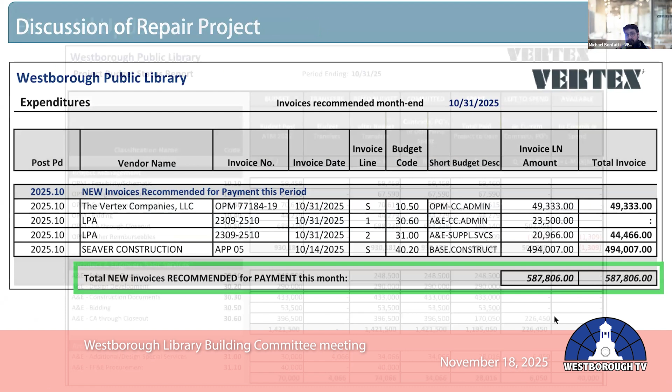From that, we have a review of our current budget status report, also provided in the document sent out yesterday. As a brief synopsis, we've spent roughly $3.7 million to date, with $7.1 million remaining to be spent. Any questions on the budget status as it stands?

I'll add, for the committee's edification, about $2 million is spent right now with a contract of about 8.3 million. That's pretty much in line with our original cash flow. We'll update that and make sure the finance director is comfortable with it, as we'll start to see a tick up when some of the larger mechanical equipment comes on site. You'll start seeing the invoices from the contractor go up a little in the middle of the project, then tail off again. So we'll be seeing some higher numbers in the months ahead.

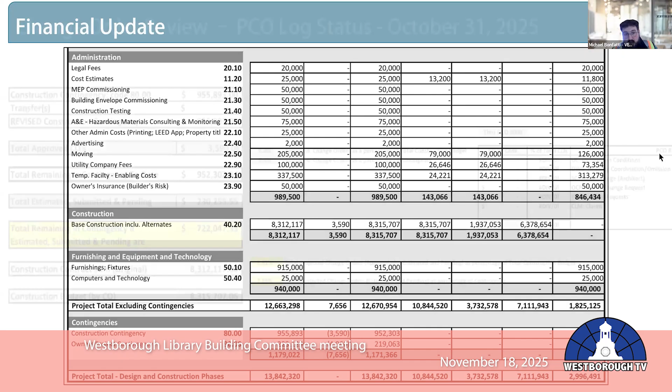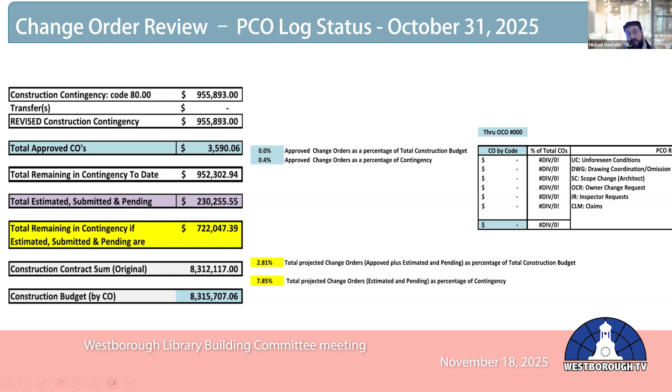And we pushed back on that, which is a formal written response to their submitted change order, or PCO, potential change order. And it came back again at the same number.

So what we want to do now with the construction change directive is use one of the tools that we have as the owner: direct them to do the work, which is fully within our rights. And then we track the amount of time it takes them to do the work, and Bob Tucker will do that on site.

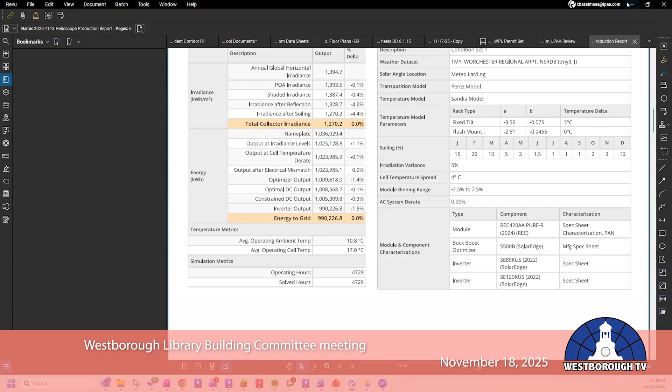There we go. Oh, nice. Oh, look at that. That was pretty.

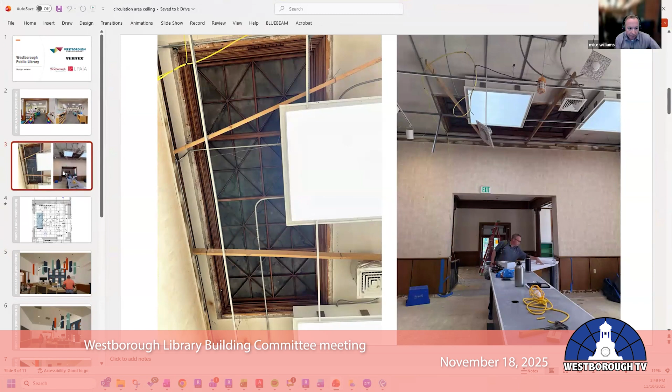So the skylight was revealed after the existing ceiling demolition occurred. At that point, we thought it would be worth pursuing bringing back this historical piece and making it a focal point for the circulation. The work does not need to happen for this project, it's just something to enhance it.

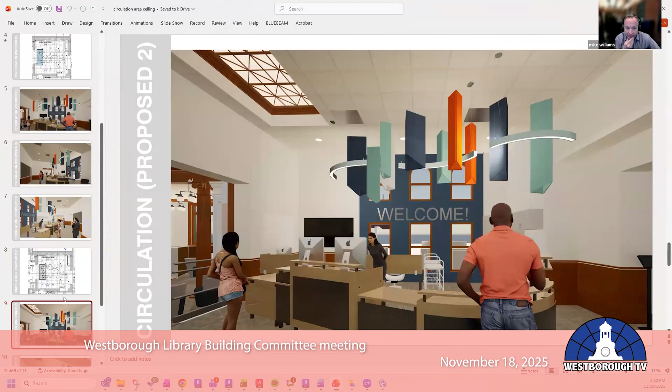Excellent description. Mary, you have a question? Nope, just a comment, just want to give my opinion, and that is, I think we're a town that values our history, and restoring this place, since it's there already, I would be in favor of going forward with this.

Can you show the with-and-without again? I mean, I think it's a really neat thing. I'm curious about Kate and Lynn's opinion because they live there, I don't, but I think it adds a real nice little element and historic charm to this place. I've seen it in the space.

It looks great. I think it would be a shame to cover it up. And I think the added benefit we've talked about a little bit in this room is that with it backlit, it creates a really special space, especially in the evening hours. I do think it adds something really special, connecting the old side of the library and the newer side, if 1980 is newer, this real breezeway that connects all the areas together. I think it adds a lot to the space.

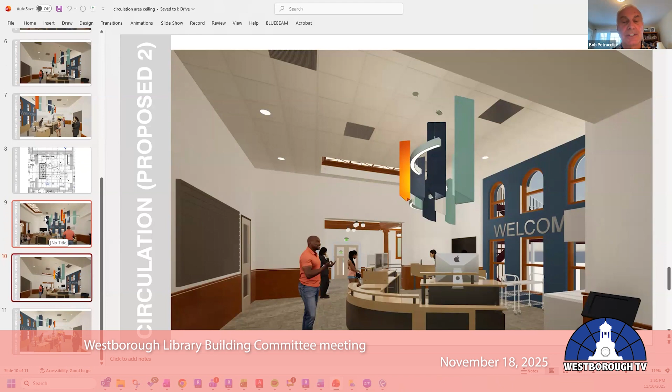For what it's worth, I agree totally that we should include that and keep that in mind. I think it adds a beautiful dimension, and as Kate said, backlit at night, it's going to be nice. Plus it matches the other one upstairs, and it's not like we're adding it. For 33,000, when we have what is it, 900-something thousand left in contingency, I think it's short money for the next 50 years.

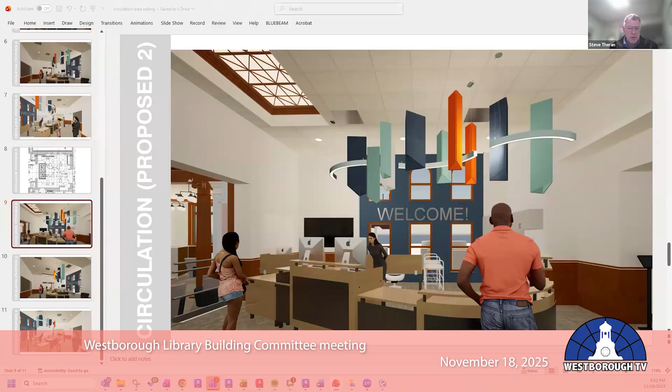So what I described was to authorize Maureen, and that was just my guess as to what might work for the committee, should the committee choose to go forward with this, once submitted, to then authorize a submitted PCO. So if there's a motion along those lines, that would be great. Would anyone on the committee like to make a motion?

I'll make a motion to approve an amount not to exceed $33,898 for PCO 4 for the circulation skylight as shown. Emery second. All right, so I will ask for a roll call.

Walter, Leslie, yes. Kate Caraccio, yes. Al Gordon, yes. Lynn Sukup, yes. Mary Johnson, yes. Bob Petroselli, yes. Pete Dunbeck, yes. Lee Emery, yes. And I am an enthusiastic yes. So that is approved. Keo, yes. Oh, I'm so sorry, Sean, I didn't mean to skip you. That's okay, I'll let you know. Thank you. All right, next item.

So these are shots of the interior of that same space, though it looks far prettier in the last picture. This is after the wall covering has been removed. Mike Williams, I'm going to lean on you again, if I could, to describe what was envisioned here for the work.

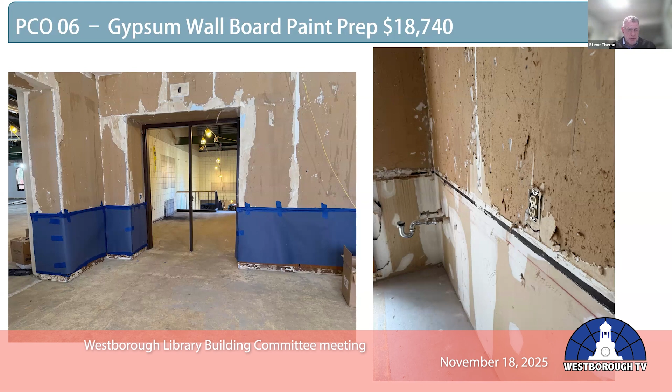What we're looking at here is the main floor, or second floor as I term it. Some progress we've been making lately - it's looking much better, like it'll actually turn into a usable space again. We have a lot of ductwork that's gone up into the ceiling space, come a long ways from having nothing up there at all. It's also allowed us to continue with framing activities in the same area.

We've got a lot of framing going on, the ductwork going up, and rough electrical wiring going on, not only in the ceiling space but also coming down inside the walls, specifically the two toilet areas being installed in this space. That's going along very nicely. We have plumbing going on in that area too, and we had a rough plumbing inspection for the bathrooms yesterday that we passed, which is another step to let us continue our normal construction sequence.

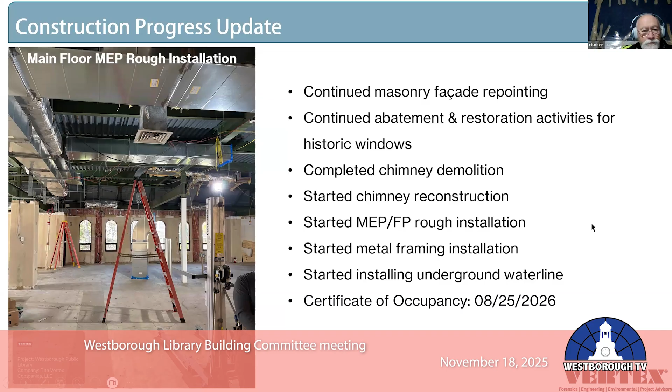We're going along nicely. Got a couple more pictures.

What we're looking at here is the north side chimney - you do have two of them, one on the north, one on the south. The picture on the left is the liner or flue of the chimney as it's been restored, and they were in the process of bringing the decorative brickwork back up on the exterior of the flue area. Also last Friday we had a crane on site where we lifted up the cap pieces that go around the perimeter of the chimney to finish that work off. On the right hand side is the staging, which is blocking a beautiful chimney nowadays, and that will be coming down in the near future.

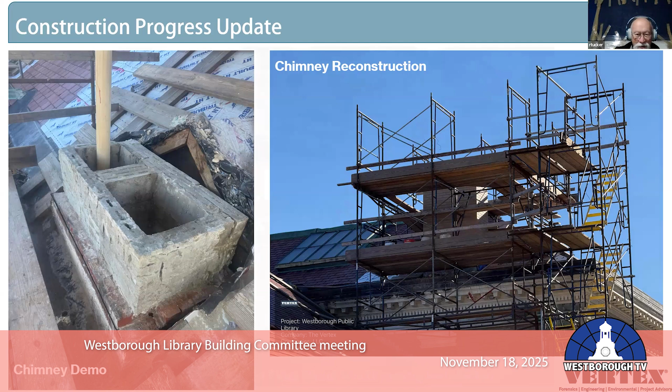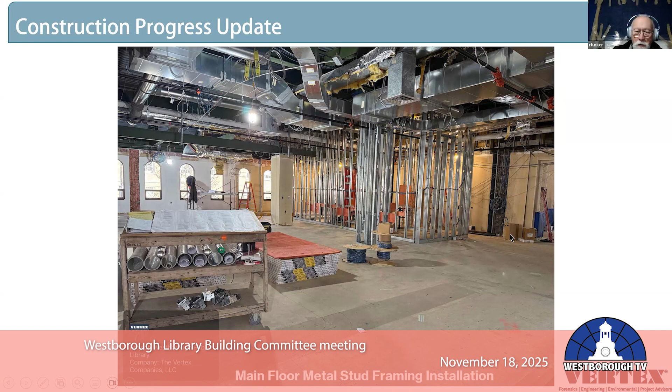Once again, this is the second floor main area. You can see the wall framing around the bathrooms and that last storage room area. Another angle of all the ductwork that's up in the ceiling space - when we get done you'll never see it again, but it is moving along very nicely.

Our favorite trench that we love to hate. This is a couple of photographs of the trench and the installation of the new sprinkler water line and domestic water line as they go up into the building. After much trial and tribulation, today we were under the watchful eye of the town water department and we were able to pass our pressure test of the line, which will allow us to now go on to the second step of chlorinating to clean the line, and also backfilling the trench and being able to remove the plates in a permanent manner. So not much longer for those plates to be out in the road, with some sort of luck.

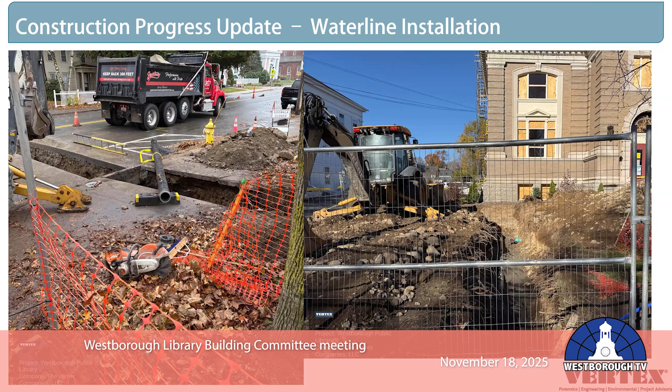Awesome. Thank you. I saw Al's hand up - did you still have a question? He answered my question. I had a question about the pressure test. Thank you. Yeah, you'll have to excuse me, for some reason I just lost my picture here. We're all set, Bob, so I'm blind. All right, that's the extent of our presentation.

Any questions for the team? Go ahead, Mary. Did we not vote to approve this month's vendor package total? We did not vote for it. Do we typically vote at this meeting? Some projects we did, some we did at last month's meeting, so that's why I was asking. Thank you, I completely missed that.

Before we go to that, did anybody have any questions about any of the things we just saw? No, but it's super exciting. It is so exciting. One question was the water pipe need - was it because we've added more use, in essence multiple bathrooms and things like that? That's why we had to attach something new. I wondered about that too. Yes, that was the primary reason behind it.

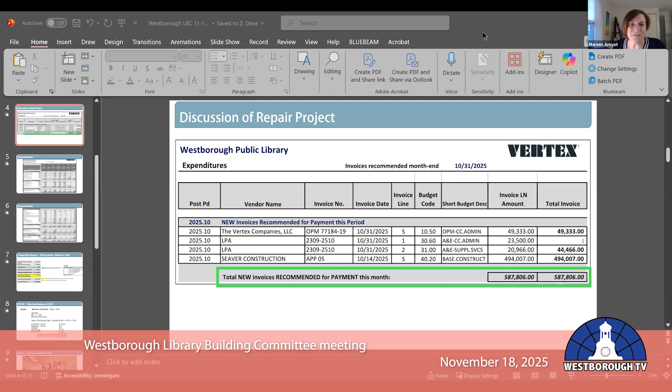Lynn, Pickup, yes. Bob, Petroselli, yes. Al, Gordon, yes. Kate, Caraccio, yes. Mary, Johnston, yes. Pete, Dunbeck, yes. Sean, EO, yes. And I'm yes. So those are approved. Okay, awesome. Thank you.

Next on our agenda is any other building related issues.

Did we actually lose a tree out front, Maureen? Yes, we did. They had to take one tree out in order to put the new water line in, and it was a tree that was not doing well anyway. I was glad to see the other two still there because it's so nice to sit in the shade in front.

Okay, so no other building related issues. I did want to mention just for the committees' information, Westborough Library will be the host of a legislative breakfast this season. If you've never been to one, highly recommend. It's a chance for you to meet with our local legislative delegation from the Massachusetts State House to talk about how important libraries are to the community, and especially why this library is important to this community. And Kate had the fantastic idea of having it at the temp site.

I go to a lot of legislative breakfasts. I always have, because I love the opportunity to talk to elected officials. And they're not often held in temporary locations. So it's a really innovative way to do a legislative breakfast.